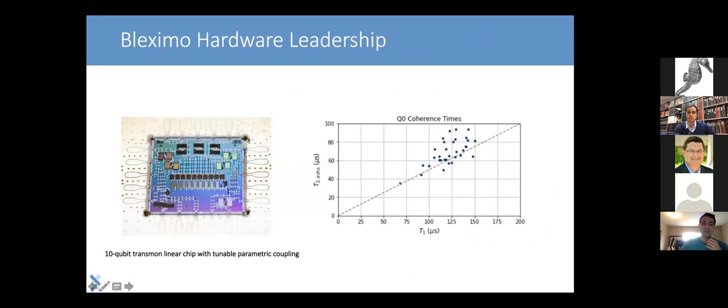Finally, I'll end with this video showing how one would design a chip. This is what we do - we start by designing a chip and then analyze all the modes there to try to minimize crosstalk and things like that. This video was done by Chiara, our microwave engineering lead. It takes about 40 seconds or so.

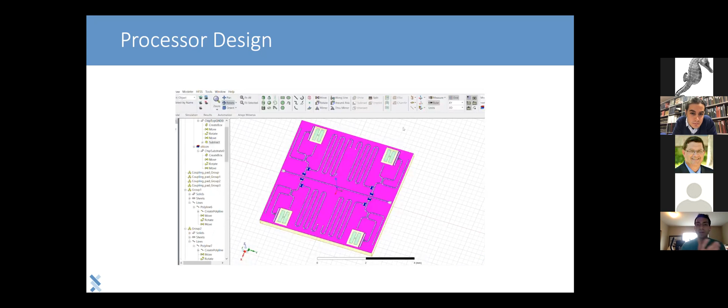This is just a 4-qubit chip to clarify. We essentially play around with different designs - more than play around, we study them carefully to understand how to get the best performance. That's one of the really important tools if we're thinking about deploying this for specific applications. By understanding exactly what different parts do and how to lay them out correctly, we can trade off between things that one might want in one application and not in another.

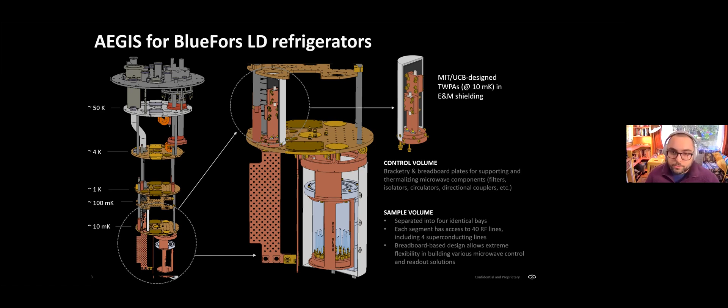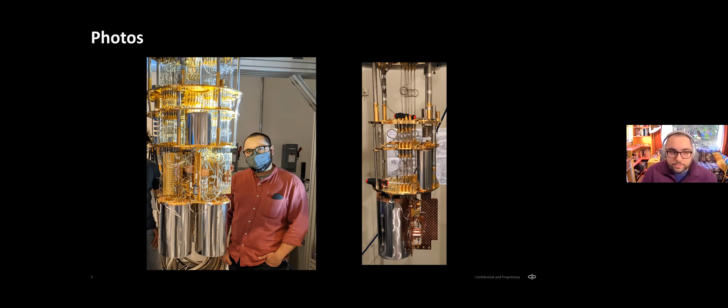But anyways, the topmost plate here, I'll create a little laser pointer. So you see it looks like a chandelier because there are a lot of plates connected by these support struts, and every plate gets progressively cooler. The topmost one is exposed to the room environment, is at room temperature, and then there are different types of cooling processes that get you down to successively lower temperatures. First 50K, then 4K, 1K, 100 millikelvin, and then the last stage is 10 millikelvin.

And as you go down, the cooling power of each stage gets less and less, until you're down into nanowatts of cooling power at the 10 millikelvin stage.

And for those of you interested in learning about helium dilution, it's very interesting. You mix helium-3 and helium-4 together, and it produces some sort of strange quantum cooling effect. It's honestly a little bit out of my wheelhouse, but you guys should look it up, it's really interesting stuff. Also interesting, this isotope of helium that you use to do helium dilution can only be produced through a weapons grade plutonium program, so you need connections with people who can produce this byproduct.

It's very expensive, comes in these little orange canisters, and you handle it very gingerly. There's a whole room full of equipment designed to handle this tiny amount of gas very carefully so it never gets lost or released into the room. It's not poisonous, it's not dangerous, it's just really expensive, and nobody wants to go through the hassle of getting more helium-3 gas. So a lot of time and energy is spent trying to conserve that, getting it into this nice closed loop in the system.

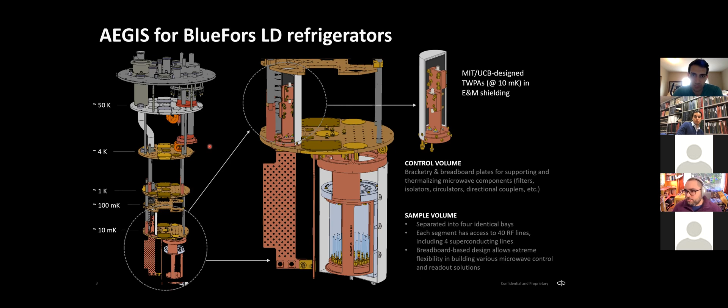So if people are working on, Fabio mentioned Chiara, our RF lead, she's working on a new chip with a new architecture optimized for some new algorithm, for some new client or whatever. In order to swap out that chip into the system, you need to warm the machine up, then swap it out, then cool it back down. Reducing the time it takes to iterate on a new design just lets us move faster as a company on a whole.

What else here? You can imagine these parts, it's kind of a lot of work. They start as a solid cylinder of copper, and then a machinist comes in and removes most of the material to get these very light structures that you can see here.

Another big thing we do is we work on jigs, and we spend a lot of time thinking about design for assembly, design for service, design for maintainability. A big problem we've noticed in a lot of academic labs running fridges is this term we have called 'grad student proof.'

Sometimes there's way too many people around a single fridge, all trying to screw in a screw from a certain angle. Everyone's bumping elbows, people are leaning on the fridge, people are getting their fingerprints in the fridge. It's kind of a fragile structure, the whole thing.

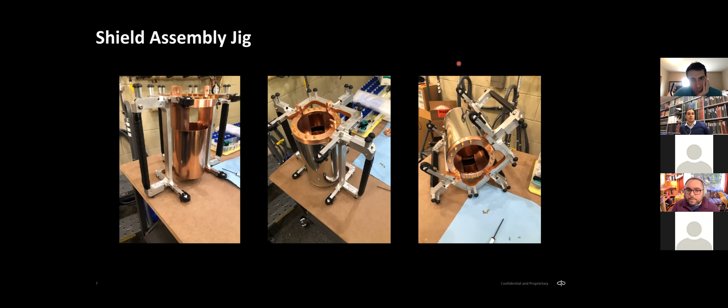So the more you can design this system to be assembled on the bench and to be modular, with elements that come off the fridge and can be very easily and quickly swapped out, the better. My previous experience in medical device design, I was basically building machines about this size and complexity, but it was all pumps and valves and fluid lines. Still, this is pretty similar.

Instead, it's shields and RF components and RF lines. But across any industry, aerospace, maritime architecture, quantum computing, you always need that eye towards serviceability, so that you're not getting bogged down completely disassembling the thing and then reassembling it every time you want to make a little change and iterate on your design.

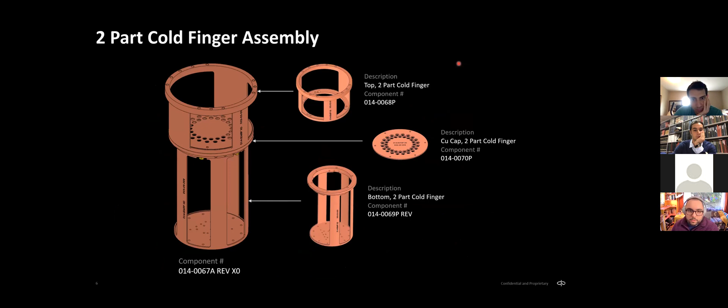Another thing we focus on a lot is materials hygiene. Some of you who've worked on a cryogenic setup before know this, but a single fingerprint in the machine adds in organic compounds that don't thermalize properly and end up adding a lot of noise into the system. And likewise for any impurities in the metal, especially iron impurities.

So we make sure all of our stuff is made out of the highest purity commercially available copper, which is also the hardest to machine, so it adds some manufacturing complexity. But if you start using less and less pure grades of metal, you have to make sure those types of metal are further and further away from the qubits, or else you're going to start seeing a lot of noise injected into your results.

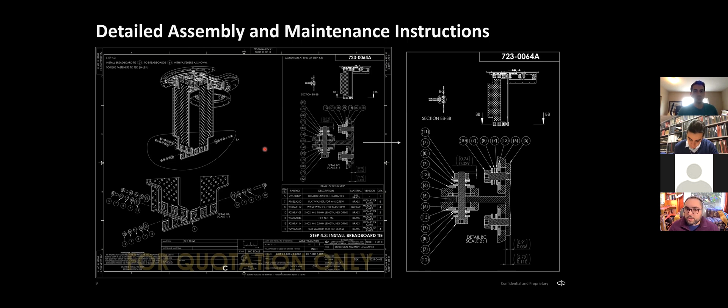Right now, Fabio mentioned we're working with the AQT, Advanced Quantum Test Bed at UC Berkeley, and also with Lawrence Berkeley National Lab. You'll probably hear the whole spiel at Q2B if you're going, but we're working on selling this packaging to anyone interested, to offload the engineering challenges of making this hardware from an academic machine shop to Bleximo's engineering system, so you can focus more on the science and theory instead of getting bogged down in details like what length screw you need to bolt two parts together, or where to get that screw. We have that all figured out for you in a big package. That's another big part of what we do—staying organized and flexible. Just hand someone a drawing and they know exactly how to put it together without needing a lot of coaching or an applications engineer to visit.

Another big aspect of good hardware is rapid iteration. We have this nice 3D printer, and we never commit to buying anything in metal until we've 3D printed it first and put it together on a bench. That's one thing I'm excited to do more of in the next year—more rapid prototyping, to keep our designs moving as fast as possible.

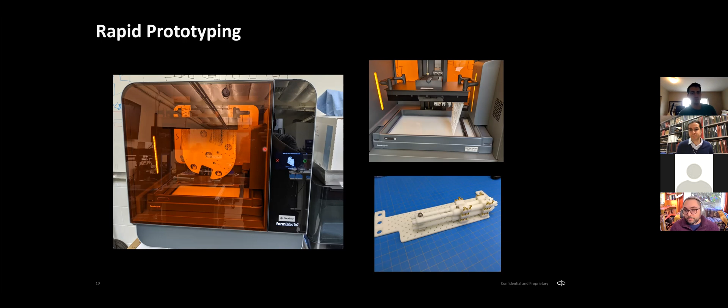Another big aspect, as I mentioned with those drawings, is staying organized. Every part we deliver has a barcode, a serial number, and all the information you want to know about the design right there on a label on the bag. Each label corresponds to an entry in a cloud-based production tracking system we have. This is super essential for staying on top of exactly what's going on in each fridge you have. There's a big problem we've noticed where a cooldown happens and half the qubits don't work, and no one knows why, and no one even knows what's in the fridge connected to those lines, because there are a million different people running around and no one is really making a list of all the hardware that went into a machine. This is how we keep track of all the hardware we send to different people for different machines. Operationally, it's a big part of how we try to stay on top of troubleshooting for all of our designs.

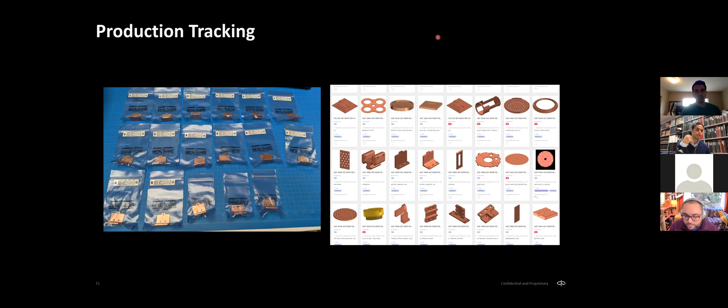Another aspect I don't have a slide for is that a lot of these designs are kind of manufacturing driven. When it comes to the thickness of each plate, how much material we remove, and what kind of screws we use everywhere, that's mostly based on our industry experience with what a manufacturer might want to make for us. But in the coming year, we're going to focus more on finite element simulations, trying to understand exactly where the bottlenecks are in the flow of heat out of the system, and letting our designs be driven more by that instead of a manufacturing-driven approach, which is how most people do it right now.

Fabio might have mentioned that we're buying our own fridges pretty soon. We have a new facility we're moving to, and we're growing a lot as a company right now. I'm pretty excited to get our hands on our own hardware, since there's a lot of iteration we can do much more quickly that way. Right now we're working with our collaborators, which is very useful in a lot of ways, but there's nothing like having your own hardware to mess around with. So I'm pretty excited about that.

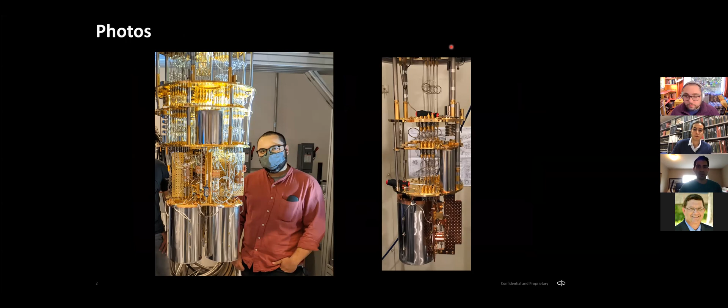Okay, so I guess we can take questions now. I have a clarification question. I don't have a background in hardware, but from what I can tell, it's really hard to physically make stuff. And I'm understanding Bleximo's approach is kind of hardware agnostic, where you start from a problem and then co-design the hardware and software together specific to that problem. But each of these problems have different specific requirements. So how do you identify the problems themselves?

Let's say I have an optimization problem, and then Jeremiah wants to do derivatives pricing, so some quantum Monte Carlo stuff. And another researcher wants to do machine learning stuff. So how do you choose? Let's say you have these three clients. I'm assuming you are going to work with clients, offering consulting or building stuff according to them. Or do you identify problems yourselves? So how do you decide what to build? That's my question.

It's a great question, for Fabio maybe. A lot of it has to do with... so the problem is I lost half the question. Oh, okay, sorry. Do you want me to repeat, Fabio? There are so many different problems, and wait, I think we lost you. Are you here still? I'm here, but I turned off my video so that hopefully it's more stable for me.

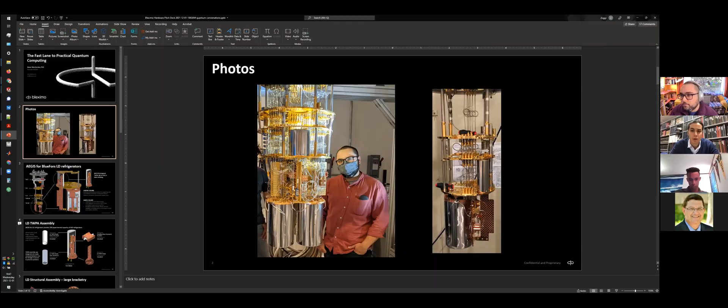So got it, okay, thanks. Yeah, so the short version is that the fab of the chip, and even chip design, is not something that will likely be fully scalable — there's not going to be a SaaS solution that produces a chip for you, at least maybe not in the next few years. That's labor intensive, and so with the company's resources, that does mean that to some extent we can't work on every single problem. There is some prioritization that happens.

Yeah, okay, and that's decided internally through R&D, I guess. Yeah. Okay, cool, very cool. Any more questions?

Yeah, I have a very specific question actually. In your presentation, on a couple of slides, there was this thing called TWPA — can you explain what that is?

Yeah, a traveling wave parametric amplifier. It's a little bit beyond my wheelhouse to tell you exactly why we need it or why it looks the way it does. But from my perspective as a mechanical guy, it's a super expensive, super special RF component that comes from Lincoln Labs at MIT, and it's very important for getting high quality signals out of the qubits. Maybe Fabio can talk more about that. I don't know — nope, that's my limit there too.

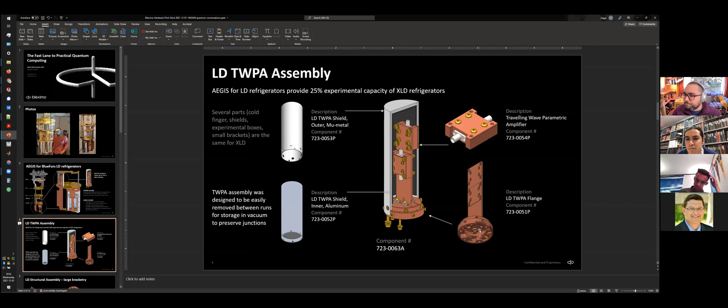Does that help you at all, Siddharth? Yeah, thanks a lot.